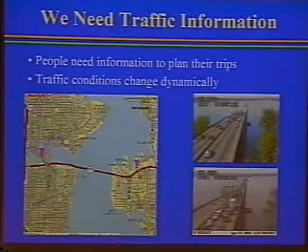There's no sign showing that the gap is starting to get smaller. So that means we have to deal with this kind of traffic condition.

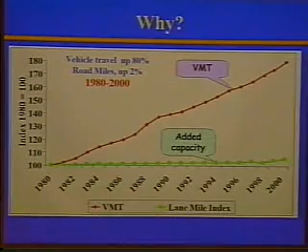Okay, let's look at the condition in Seattle. This is the ranking in the year 2000, and Seattle was ranked 5th. A year earlier, in 1999, Seattle was ranked, I think, 2nd. So this year, the new ranking for the year 2001, Seattle is 9th.

But we see a new star, which is also the job security for you guys - you got number 8 in the country. So the traffic congestion on the West Coast is becoming more and more serious. So as traffic professionals, we have to deal with that.

What are the countermeasures? Because we are all traffic engineering professionals, we are supposed to solve these problems, right? So what's your countermeasure? Give me some idea. Yeah. Other roads? And what's your proposal? I'm sorry, everyone should ride bicycles. Oh, that's a good idea also.

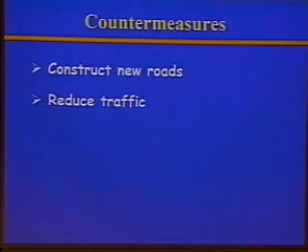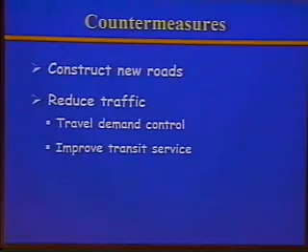Yeah, I think new construction is definitely the traditional solution, and people tend to think of it that way. And another solution, as you mentioned, don't drive your car. You can take the bus, or you can ride your bike. So this involves travel demand control, and it also involves whether you can improve the transit service so many people would like to take transit. There's one more solution, that is to increase the capacity of the existing infrastructure by employing ITS technologies.

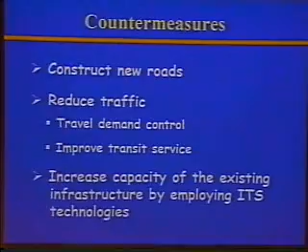Let's look at how these countermeasures may work. First, let's look at new construction. As you know, most serious congestion is normally in cities where everything is expensive. Also, we need to address a bunch of questions like where it's constructed, when. People will say, oh, don't construct new roads through my backyard. Don't go through this neighborhood. And will the new roads solve the current problem? Maybe. Will the new roads also create another problem? Not sure.

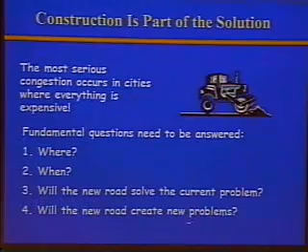Okay, here is a slide showing the role of transit. Definitely, transit will play a much bigger role. For example, we have developed this kind of application that shows the bus locations in real time so that you can find a convenient time to go to the bus stop and take the bus. This will definitely help people switch from driving themselves to taking transit. But transit also has a capacity.

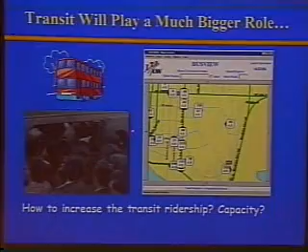This picture was taken when I was in Japan. You see, it's very crowded, and when I was in Japan, I had to commute by railway, and it was about an hour and 20 minutes one way. So every day I spent maybe 3 hours on this kind of crowded train. So if transit is also close to its capacity, we cannot really do anything about that.

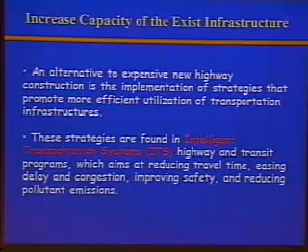So the third solution will be to employ ITS. This has been enforced in many new initiatives, also in the ISTEA Act. ITS shoots for reducing travel time, easing delay and congestion, improving safety, and also reducing pollutant emissions. You may want to know whether this solution will work.

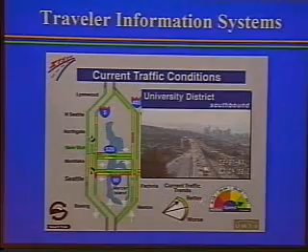This picture shows a snapshot of the traveler information broadcast by University of Washington's cable TV. Basically, you see there are two kinds of information. One is the larger scale traffic speed information. This is the freeway network in Seattle. And also, for a particular point, you can see the video image captured by the surveillance video camera. You may want to know how this information is produced. Different colors show different speeds, right? Like red shows speed from 0 to 19, and green shows speed higher than 50.

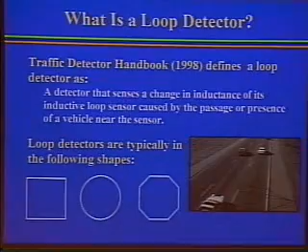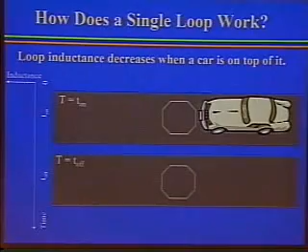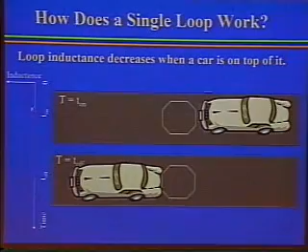How does a loop detector work? Suppose a vehicle drives close to the edge of the loop detector, and then the detector senses the presence of the vehicle, and the inductance drops from high level to low level. And when the vehicle drives away from the sensor, it goes back to the normal level. So this is how a single loop detector works. And when you see this kind of change of the inductance, you know there's something metal on top of the loop for this long, from T on to T off. Suppose this is the measurement in the time interval, suppose it's a 20-second interval.

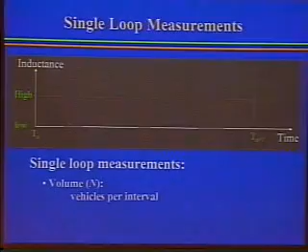If we see a curve like this, do we know how many vehicles presented? Three, yes. We have 3 vehicles because you see 3 jumps, right? So that means the single loop detector can measure number of vehicles per interval. And also, do we know how long the vehicle stayed on top of the loop? Because you see that the length of the red line here shows that, right? So we also know the scan count. And from the scan count, we can convert that into occupancy, which is a very important measure for traffic performance.

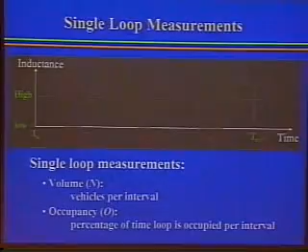There's another kind of loop detector, which is commonly called speed trap, or dual loop, or double loop. That means you put 2 single loop detectors together, separated several meters apart. And you know the distance already. You also know the loop length. So this kind of configuration can measure vehicle speed, right? Because when a vehicle arrives at the first loop, you know the arrival time. And you also know when the same vehicle arrives at the second loop. You know the time for the vehicle to traverse this distance. You can easily calculate the speed.

And if you know the speed, you know how long the vehicle was on top of the loop. You can also calculate the vehicle length. And based on this information, you can classify vehicles into different categories. In the Washington state system, vehicles are classified into 4 categories based on vehicle length.

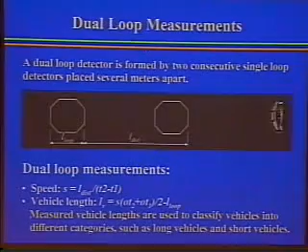So now let's summarize what the loop detector can do. A single loop detector can measure occupancy and volume, right? And the dual loop detector can measure traffic speed and classify the vehicle volume. We call it bin volume. So which of the 4 measures is the most valuable for travelers? Of course, speed, right? It doesn't make sense for travelers to know the occupancy. And they don't care about the bin volume. So speed is the most important variable for travelers. So speed is important. But is speed available from a single loop? No.

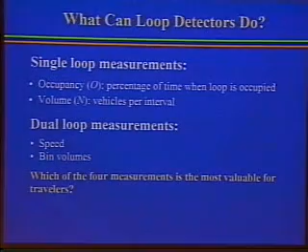Speed is important, but another very important piece of information we can get from dual loop detectors is how many long vehicles, how many short vehicles, or in other words, how many vehicles in bin 1, bin 2, bin 3, and bin 4. From the planning and operation concerns, we want to know long vehicles because they are so different from passenger cars. They are too big. They have a heavy weight, a very large turning radius, and their acceleration and deceleration are very different from passenger cars. We don't want a truck to stop and start very often at the intersection. Otherwise, we have to spend more money on the pavement. Also, the pavement requirement. All these things make us eager to know how many trucks are in the flow.

There are also safety concerns because long vehicles or long trucks account for only 3% of the registered vehicles, but they are responsible for 9% of the fatal accidents.

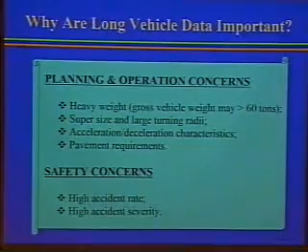So the truck data or the long vehicle data is also very important for us. However, there are not many dual loop detectors deployed in the country. So if you want to put another loop at each single loop station and make that single loop a dual loop, you can do that, but it's expensive. You need to spend from $3,000 to close to $6,000 for each loop. And this is still the data I got 3 years ago, so now I suppose it should be more expensive.

It's not only because of the loop device, but mainly because of the indirect costs, like you have to close a lane to do the upgrading, and that causes lots of delays. And if you convert that into money, that's a lot. So making the existing single loop detectors capable of providing better speed and vehicle data is of practical significance. And today, I'm going to present an algorithm we developed at the University of Washington for this purpose.

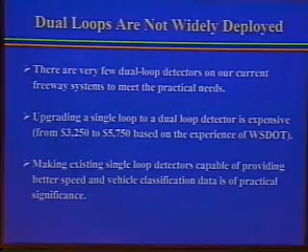Before I introduce the algorithm, let's look at the data format. This shows the loop detection system at Washington State. We have loops deployed on the major freeway system, and these loops transfer the real-time measurement to the station cabinet. And in this station cabinet, the data are aggregated into 20-second intervals and then transferred to the TSMC, which stands for Traffic System Management Center. And there, the data are archived to some media.

Meanwhile, it's pushed to the internet application server, so everyone can access the server and download the data in 20-second intervals. So the data will look like this. It contains a time mark and also how many vehicles in that 20-second interval. And the last item shown on the screen is the occupancy. Actually, the Washington system produces the scan count, but normally in other systems in the country, it shows occupancy, so I just use occupancy instead here.

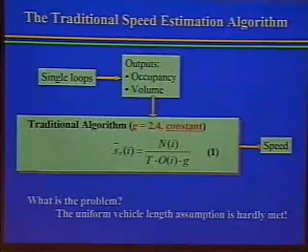Here, see, N is the traffic volume that's available from single loop, right? Occupancy is also available. This big T is the interval length, which is 20 seconds for Washington State. So there's a problem with this algorithm. What's the problem? That's because the uniform vehicle length assumption is very difficult to meet. Let me show you an example here.

Suppose this is a condition on a freeway and the speed limit is 60 miles per hour. If you are a driver and driving under this condition, which speed would you go? 70? Yeah, I believe you are honest. Yeah, I will drive also at least 70, but I won't tell police about this.

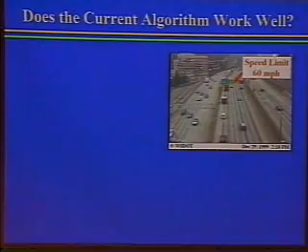But let's see what's the system estimated speed. Here in the blue circle is exactly the location that's shown in this video image. And the color is now yellow, right? What does the yellow show? It shows speed between 35 to 49. Is it so slow? Of course not. So the speed is underestimated. Why is it underestimated? From here, you can see there are lots of big vehicles or trucks here. Probably that's something related to them.

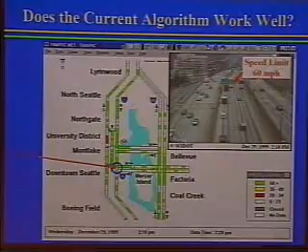But let me show you another extreme case to show the problem with the algorithm. Here, suppose in 2 consecutive 20-second intervals, we have 1 vehicle in each interval. At interval t, we have only 1 short car. At the next interval, we have just 1 long truck. Suppose these 2 vehicles are all traveling at 60 miles per hour.

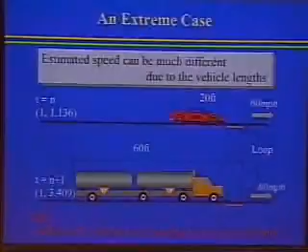And the effective vehicle length for the long truck is 60 feet. Here, effective vehicle length is the vehicle length plus the length of the loop. So it's called the effective vehicle length. That's actually the length a loop detector can see. Let's calculate how fast the speed is. For the short vehicle, we see the calculated speed is 66 miles per hour. It's higher than the actual speed, but that's okay. That's not too much difference.

But for the truck, the speed is only 22. That's too low, only 1/3 of the true speed. So what's the problem? Is that a 3 times difference? No, we see that they all actually drive at the same speed, 60 miles per hour.

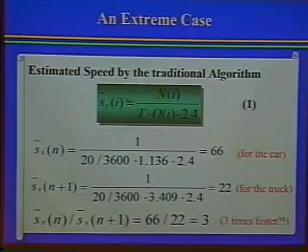So the short answer on why they give different speed estimations is that the g value we chose was a constant, but for these 2 scenarios, the g should not be the same. So what is g related to?

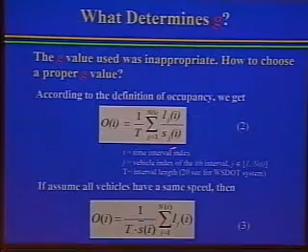From this formula, we know the occupancy is equal to the sum of all the single vehicle on-times divided by the interval length. From this equation, we can get that g is actually the reciprocal of the mean effective vehicle length.

So that means if we know the mean effective vehicle length, we can calculate g. If we can calculate g, and use this correct g to calculate speed, what happens? Let's see for that same example, but this time we use the actual vehicle length to calculate g, and use this g to calculate the speed.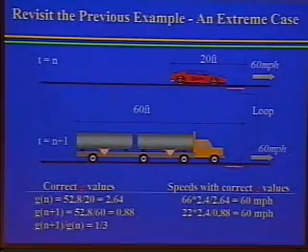Oh, it's 60 miles per hour. Now it's correct. Again, the truck is also correct. So from this example, you know the key point is how to get the correct g. But if you want to get the correct g value, you must know the vehicle length.

Is vehicle length measured by a single loop detector? No, we don't have that. So we have to find a way to estimate vehicle length, or find another way to get rid of the effect of long vehicles, so that we can still use the traditional speed estimation algorithm, but it will give us the correct speed.

So before we do that, let's look at the vehicle length distribution. This distribution is observed by a dual loop detector on southbound I-5. We see there are 2 peaks in this histogram. The first one is very high, representing the concentration of short vehicle lengths. The second peak, which is lower but broader, represents the length concentration of long vehicles.

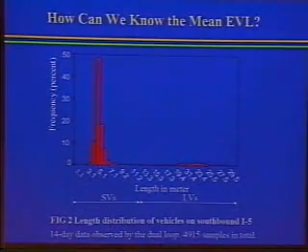If we separate the total vehicles according to their length — longer than 40 feet we say that's a long vehicle, shorter than 40 feet we say that's a short vehicle — and look at each vehicle length distribution individually, we get these two figures and also the statistics.

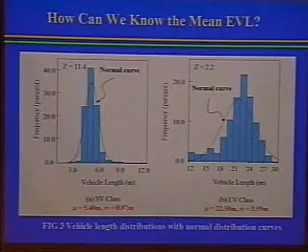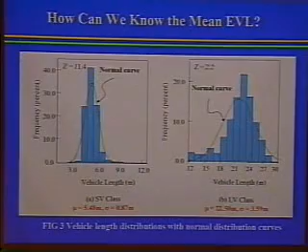For the short vehicle, the mean length is 5.48 meters, close to 18 feet, and the standard deviation here is 0.87 meters. But for the long vehicle population, the mean is over 22 meters, and the standard deviation here is 3.59 meters. This tells us that short vehicle length doesn't vary much, it's very close. But for long vehicles, the length difference is big, as shown by these statistics.

So for any interval k with nk short vehicles detected, that means for a particular 20-second interval, there are only short vehicles, no long vehicles. In that case, we can use the observed short vehicle length from the last slide to approximate the mean vehicle length for this interval, because it doesn't vary much, so the result should be close.

Especially if you have more vehicles in this interval and take the average, the error is even smaller. For example, if we have 9 vehicles detected in this interval, and we know the observed mean vehicle length is 5.48 meters, and the standard deviation is only 1/3 of the standard deviation from the observed vehicle length distribution, because we have more samples — the variance should be calculated by equation 8 — we get it's only 0.29 meters, less than 1 foot. Very accurate, right?

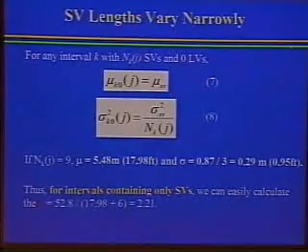If there are long vehicles in the interval, what shall we do? Let's look at this single loop measurement again. If we can get the on-time data for each individual vehicle, and the data looks like this — we have 4 vehicles here, and each on-time is shown here.

Do we know which vehicle is longer and which vehicle is shorter, just based on this data? Yes?

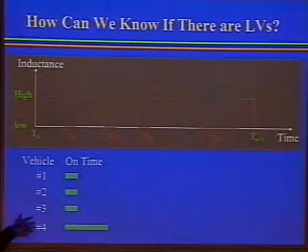Number 4, I would say no. It could just be a really slow vehicle that's passing over it. We cannot just conclude which is longer or shorter based only on the on-time. We have to consider that the effective vehicle length is equal to the product of speed and on-time.

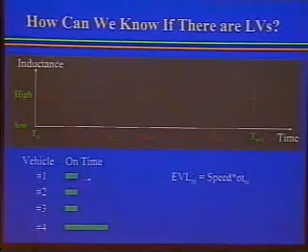But for freeways, mostly the vehicle speeds are very similar, right? If we can assume that the speed is constant, we can just infer the relative length from the on-time. But for a single loop detector, remember we don't have the measurement for each individual vehicle. Instead, we have the aggregated measurement for a 20-second interval. But following the similar idea, we can still guess that maybe in interval 5 we have some long vehicles there because the on-time per vehicle is bigger than the other intervals.

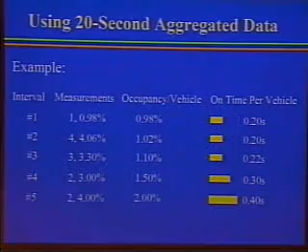So we need to make assumptions to solve the problem. Our first assumption is for a certain time period—this period is different from the interval, it's longer and contains several intervals inside. For example, the period length could be 1 minute with 3 20-second intervals inside, or it could be 3 minutes containing 9 20-second intervals. So suppose within that time period, traffic speed is consistent because it's the freeway and the time is not that long, so this is a reasonable assumption.

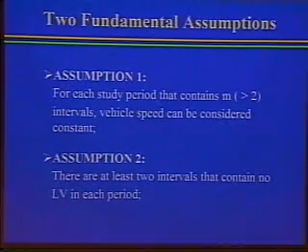Our second assumption is that there are at least 2 intervals that contain no long vehicles in each period. Suppose you choose the period at 3 minutes, there are 9 20-second intervals, and within those 9 intervals, suppose 2 of them contain no long trucks. The reason we want this is we want to set up the ruler—with this, we can measure other intervals.

Are these intervals reasonable? I think it's reasonable because I checked the data for 24 hours, and the speed changes larger than 15% only occur in about 46 out of 288 5-minute periods. Given the long vehicle arrival rate as 0.47 vehicles per 20-second interval, the probability of violating assumption 2—that at least 2 intervals don't contain long vehicles—is only less than 1%.

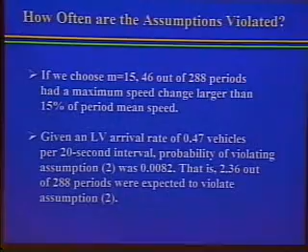So based on the 2 assumptions, I propose a 3-step algorithm. The first step is you look at all the 5-minute interval measurements simultaneously, and then based on their relative relationships of the on-times, you try to separate this whole group into 2 parts: one part contains only short vehicles, the other part may contain long vehicles. The second step is you use group 1, which contains only short vehicles, for speed calculation.

Because for short vehicles, the length varies very narrowly, and you already know the mean vehicle length, and that's the majority of vehicles on freeways. So the third step is, after you calculate the speed, if it's reasonably accurate, you are able to calculate how many long vehicles are in each of the group 2 intervals. By doing so, a single loop can work somewhat like a dual loop—we don't put another loop there, so we can save money.

Because just talking about the algorithm is kind of boring, I show you this picture to illustrate the methodology. Suppose we choose the period length as 5 minutes—that means we have 15 intervals. Suppose this is the 15 interval measurements for the loop detector, and the data you can access is at the rightmost column. Here, suppose these vehicles are presented in each interval.

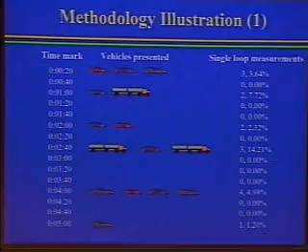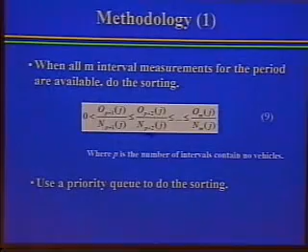The first thing we need to do is calculate the on-time per vehicle and sort it. I would like to skip this mathematics because when I was a student, I hated reading these things in a short time, but if you're interested and want to discuss it with me, you're welcome to come talk to me after the seminar. So here I just skip these things and illustrate the algorithm.

After you sort the intervals, you'll see these are all intervals without any vehicles, and you should cut these intervals because they aren't useful at all. Just drop them, and now you have 6 intervals that contain vehicles. What you do next is, based on the occupancy per vehicle—since this can easily be converted to on-time per vehicle—you compare against a critical value and figure out which interval belongs to group 1, the interval that contains only short vehicles, and which interval belongs to group 2, meaning it may contain long vehicles.

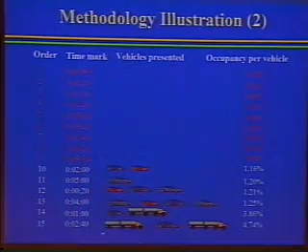So here you set up a critical value alpha based on the distribution features, and then you compare each interval with the short vehicle length.

If it's larger than alpha, you assign this interval to group 2. Otherwise, you assign it to group 1. So suppose now you have finished the classification.

Now you got the non-zero measurement intervals successfully separated into 2 groups. Here is group 1 with 4 intervals and group 2 with 2 intervals.

Which group of interval measurements should we use for speed calculation? Group 1, yeah, because these are all short vehicles.

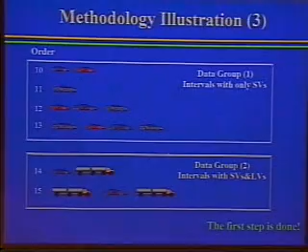We know the short vehicle length, and we know that it's sufficiently close to the sample vehicle length, because short vehicle length doesn't vary much. So we can use group 1 to calculate the speed.

So after the speed is calculated, we have another problem to solve, right? That is to figure out how many long vehicles are in each of the group 2 intervals.

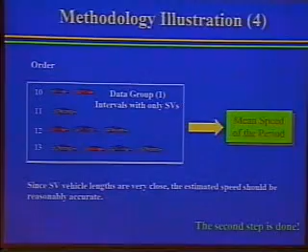So here I propose the nearest neighbor decision rule to identify the number of long vehicles in each group 2 interval. The way we do it is we need to have some pre-classified categories.

How to set the pre-classified categories? Here we set it up based on how many long vehicles it contains.

Suppose the maximum number of long vehicles in one 20-second interval is y, then we have y plus 1 predefined categories, right?

Because you have the categories corresponding to the number of long vehicles from 0 to 1 to y. So that's why you have y plus 1.

If you have any questions, just feel free to stop me, okay?

Yeah, but there's a possibility, because this kind of classification is based on the on-time per vehicle, and it's not an exact measurement.

So I say for group 1, you are sure these are intervals without long vehicles. If you set it strict, you get a better speed measurement, right?

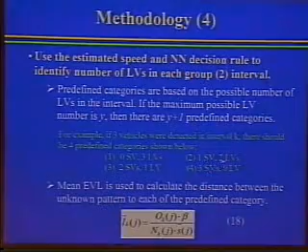So the way you calculate that is through these equations, and here is how the distance is calculated. Now suppose we have done the distance calculation.

We have two intervals that are in group 2, right? And suppose for interval 14, we calculate the similarity to each of the 3 classified categories.

We have only 2 vehicles, so there are 3 classified categories, right? And we calculate the distance.

Suppose the distance is 0.42, 0.05, and 0.63. Which one is this unknown pattern most similar to?

The second, right? So we say, okay, this unknown pattern is actually pattern 2.

And now we've got one short vehicle, one long vehicle. Similarly, for interval 15, we can do the same calculation and pick the one with the smallest distance.

So now we know for this 5-minute period, we have 3 long vehicles, 12 short vehicles. So now we figure out both the speed and also the long vehicle volume.

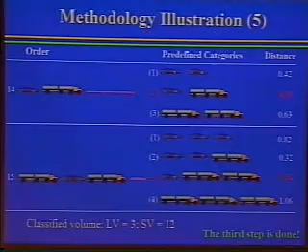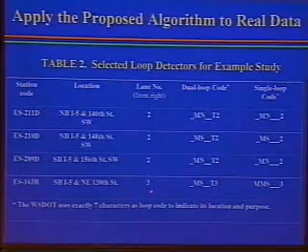So this should be exactly what we expect from the dual loop detector, right? To verify the algorithm, we picked up 4 loop stations on I-5 in Washington State, and these are the stations we picked up. At each station, we selected one lane for the calculation, and for a particular loop station, we also collected data for 4 consecutive days.

So this is the speed estimation for 4 consecutive days. These 4 days cover both weekdays and weekends. We see that during the weekday, there is some congestion, and this algorithm matches this congestion also very well. It synchronized with the true speed, shown by the red color, and the estimated speed is shown by the green color. So for weekdays, they work fine. For the weekend, they work even better.

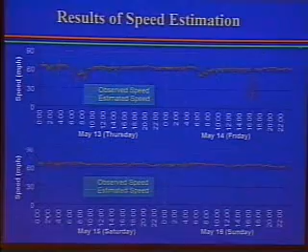This graph shows the estimated long vehicle volume at each of the 4 study stations. The 2 curves: the green curve shows the observed long vehicle volumes by the dual loop detector, and the red curve shows the estimated long vehicle volume. Basically, they synchronize well, but here, near the morning peak hour, the error is larger, right?

Here is also one station for 4 consecutive days, and we see that during the weekend, there are not as many long vehicles as during the weekday, and also the algorithm works better over the weekend.

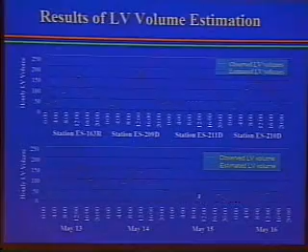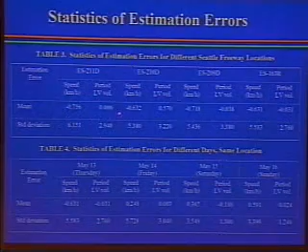These 2 tables show the statistical results. Basically, the speed estimation is very good, so the error is small. For the long vehicles, there may be individual errors that are large, but if you add all the 5-minute estimations into 1-day data, the maximum error is smaller than 8%, which should be sufficient for planning purposes.

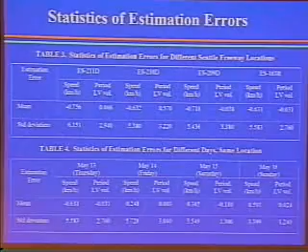Now let's discuss what we found from this study. So when traffic volume is high, traffic speed is less stable, right? We had 2 assumptions to support this algorithm. Were the 2 assumptions true? No, not always true—otherwise it's truth, not assumption, right? So there are some problems if the traffic volume is high; traffic speed is less stable.

Assumption 1, which is a constant speed assumption, may be seriously violated, and the violation of this assumption can cause the long vehicle volume to be overestimated, because some vehicles give a longer on-time actually because speed is low, not because the vehicle itself is long, right? And the violation of the second assumption is also likely to happen when the traffic volume is heavy, which can result in underestimation of both long vehicle volume and speed.

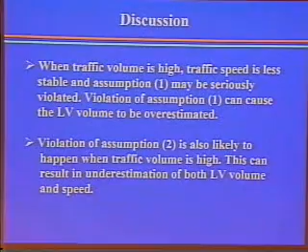So if this assumption is violated, that means you thought these two intervals should not contain any short vehicles, but actually they do. So it's like you are using a ruler which is not accurate to measure the rest of the interval, right? So this will make the biased estimation.

So as a conclusion, the proposed algorithm can produce very good speed estimates and also reasonably good long vehicle volumes using only a single loop measurement. We have demonstrated the whole algorithm, right? And to some extent, a single loop detector can perform like a dual loop detector using the proposed algorithm.

The proposed algorithm works well under normal traffic conditions, but will not work when the traffic is stop and go. Why? Because the assumptions are not true. If the assumptions are not true, the algorithm may not work.

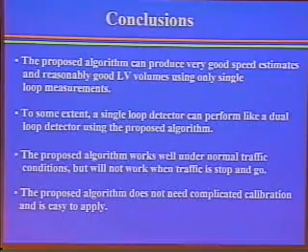Question? When you say the assumptions are not true, you're saying that in heavy traffic, like a short car might take 3 minutes to cross because they're really in traffic, and then all of a sudden something opens up, and a longer truck will take 2 minutes to cross the same thing because it kind of goes and goes. Yeah, the idea is the same.

Okay, but as I said, we have two assumptions. The first assumption is a constant speed, right? That thing will happen when speed is not constant.

The proposed algorithm does not need complicated calibration, and is easy to apply.

I have some comments for future studies. The first one is we need to do quantitative analysis on the effects of violating the two assumptions. If the first assumption is violated, what's the error because of the violation? We need to know that.

And also, guiding rules for period length selection. The data and the calculation we have done is based on a 5-minute period. What about 3 minutes? What about 2 minutes? So we need to do more work to see which time period may work better. So the automatic detection for assumption violations and the appropriate corrections are necessary for real-time applications.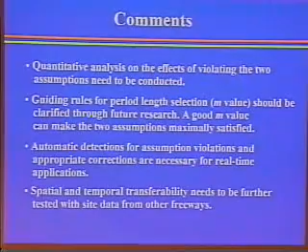Because you may implement the algorithm in the loop station, and then you leave the algorithm there. But if the traffic is congested, and you know it's not going to work well, the algorithm isn't aware of the congestion, so the data will not be good. So if violations are automatically detected, and then maybe figure out a way of handling these cases, that would be more favorable. Spatial and temporal transferability needs to be further tested with site data from other freeways. Like, will the same algorithm work for Portland, for California? So we need to test that more.

Based on this algorithm, Dr. Yinhai and I developed, we have made a computer application to monitor the freeway system. Here is a snapshot of the system. This system basically provides you the freeway network and uses different colors to show speed levels.

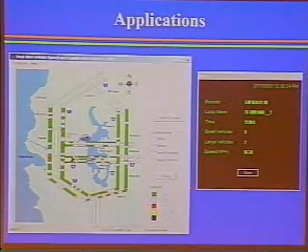But be aware that the color we use is different from the WSDOT color, Washington DOT color. So red here is not that bad, actually. Be aware of this. And if you want to look at a particular loop station, you can move your mouse there and click it, and it will pop up a window showing the details of that station. I will demonstrate this system later.

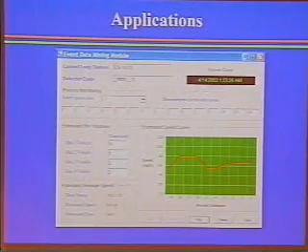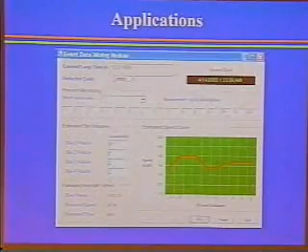Another application we developed, we call it the event data mining module, or event data mining system. In this system, we use event data, not just 20-second archive data. Event data means you poll the loop detectors 60 times per second. So that means you know very detailed information about when the vehicle arrived and when the vehicle left. That kind of data is very helpful for you to tune up the loop detectors or identify loop errors.

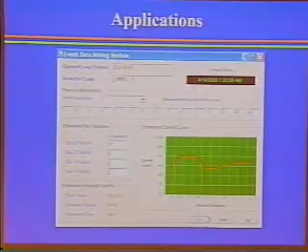So thank you for your attention, and that is my presentation. I would like to spend some time to answer your questions, and then we will demonstrate the program. If you have questions about the program, I would be happy to answer those also.

You mentioned at the beginning that one of the reasons for this was rather than the high expense of adding a second loop detector, that was the reason for even asking all these questions. So for locations such as Portland or San Francisco, who also maybe have a lot of single loop detectors and don't want to invest that money, how much is this process? I mean, are these mathematical algorithms free? How much would it cost to monitor, increase, or change the count processes in the programs?

Is it actually cheaper? Yeah, actually, there's no cost for this. It's already published in the Journal of Transportation Engineering. You can find the paper from the journal, or you can download it from my website. And to implement the system, actually, it's also very easy. You implement that and put it into the controller, and it will work for you. This work is done with support from Washington DOT, so it's a public resource already.

So I think it's very cheap, but the problem is whether the DOT has a controller that is powerful enough to implement it. In Washington DOT, the controller was a product from the 1970s, so that means that controller has very limited computing power. If you put more things there, probably it will not handle it. So now this has been developed, and currently it's only for offline application. I can give you the program and you can try it, but it's offline, not online data collection.

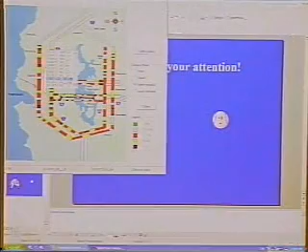You can also see the short vehicle distribution across the network. You can also see this is a loop station. If you click it, all the loop detector codes will pop up. You can select, like we select this MSS2 loop, and then a window will pop up giving you detailed information about the loop. So now the speed is 22, small vehicles 5, long vehicles 0. It's congested there.

So this is the system that we developed for real-time freeway monitoring. We have also other applications, not yet online, but if you are interested, maybe I can take a few minutes to show you another one.

I'm sorry. What do the numbers mean in the legend? Which numbers? Like the numbers in the legend. What do they mean? This? Yeah. This is the number for short vehicles, small vehicles. Oh, okay. So you have it up there. Okay. Yeah, it should be small vehicle numbers. So this system was developed by Hudong, who helped me during the research. I developed the engine, he developed the user interface.

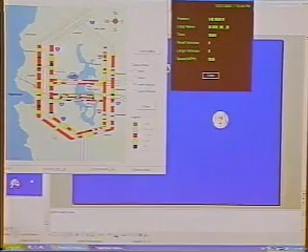I had a quick question. I think before you said that the maximum percent error between your algorithm and the dual loop was 8% for classification. Yeah, the daily long vehicle volume error, the maximum error is less than 8%. I guess my question was similar to what Tashi asked before about the order of magnitude of the percent error between the cycle data and, say, the 20-second aggregation.

We don't have cycle data here. We have only 20 seconds. And a lot of times people ask, well, what sort of errors can you expect? Do you have any sense of that, just for the count or for the occupancy? I think based on the data we use, sometimes there's only one long vehicle per interval. And the dual loop clock and the single loop clock may not agree. So you often see that in the single loop you find a long vehicle in interval n, but it shows up in interval n+1.

So if you compare these two intervals directly, the error is 100%, right? Because it's only one vehicle. But actually, it's just because of the time difference. So if you sum up all the measurements per day and look at the error, it's actually not bad. It's less than 8%. Yes?

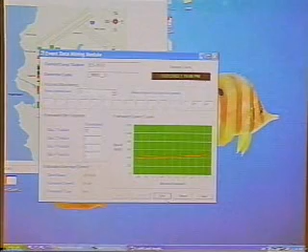So this is another system we just developed, and this is for monitoring a single loop station using the event data. Event data is a very detailed loop measurement. So we can measure vehicle speed and also classify vehicles into more categories. So here I'm demonstrating this system using the data we collected from I-5. It's true data, and we developed this program and selecting the algorithm.

We choose 3 buckets here because we want to look at 3 vehicle measurements simultaneously. We suppose any 3 vehicles collected here are not all long vehicles. That means in any 3 vehicles, there is at least 1 vehicle that's a short vehicle. So that's the assumption, but you can change the assumption to 5 up to 15, according to the condition where you want to apply this algorithm or this system.

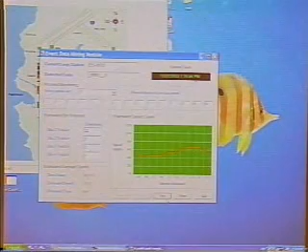So any other questions? Yes. I have a question similar to one which has already been asked. If you have a highway with 4 or 5 lanes of traffic in each direction, and you said you have single loop detectors in every lane, have you thought of taking one of the middle lanes in each direction and making a double loop detector, with the assumption that the middle lanes, being neither high occupancy lanes nor the lanes people merge onto the highway in, have similar traffic flow, and then compare the double loop lane with the single loop lane next to it?

I think that's a very good idea. Maybe Washington DOT or Oregon DOT want to do that. But the reality now is they put either single loops or dual loops at a station. Probably if you want to handle dual loop detectors, the hardware or controllers need the capability. Once the capability is there, they tend to equip all the lanes with dual loop detectors. Because if you look at the detailed data for each lane, the composition of vehicles is very different from lane to lane.